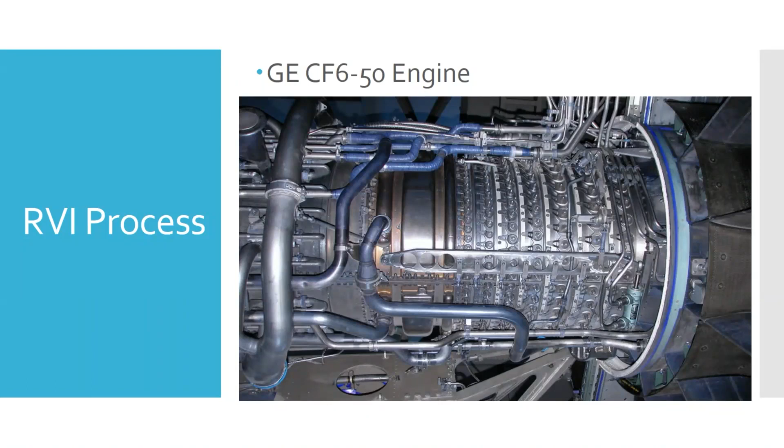So remote visual inspection allows us to look inside. So what you'll do is you'll go into an NDT manual. You'll see something that looks like this. And this is basically a roadmap for how to look at different areas. So what it's saying there in that table on the bottom, if you want to look at the 9th stage compressor blades, for instance, just going off the list, 9th stage, it says there are 66 blades.

And if you want to look at the leading edge, you go into port, what they have labeled B1-8. So B1-8 is right here. You would disconnect the bleed duct and you would stick your scope into that bleed duct to go look at the blades. And then it says if you want to look at the trailing edge, B1-9, well, that's the same location there. Okay, so that's a pretty easy one.

What if we want to look at one that's further forward? If we look at stage 4 here, for instance, it says to look at the leading edge, we go to B1-3, and that's pointing to this little thing here. Any idea what that is? So that's a little threaded boss, a little threaded hole with a plug in it. And it exists specifically for borescope. Okay, that's a borescope port.

And if we want to look at the back of that stage 4, we would go B1-4, the one right behind it, which would also allow us to do the front of stage 5. So they build these different ports in. If there's access, the manufacturer tends to have you use the access that's there, like the bleed duct. If there isn't already an access there, then they're going to put in some kind of a port, typically, to be able to see different areas.

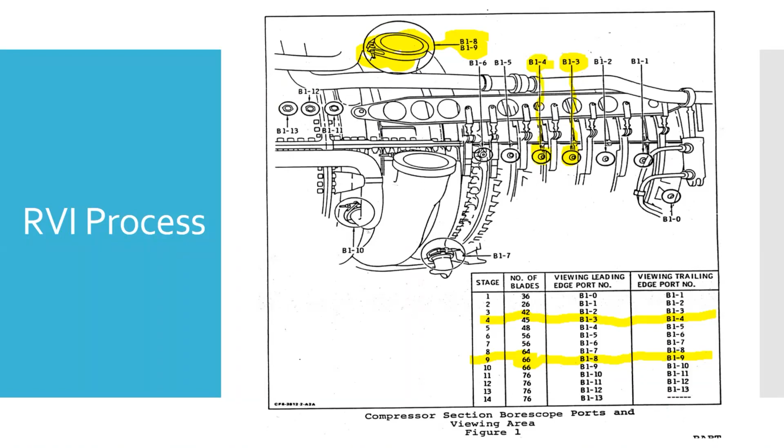So if we put them side by side, you can see this right here. There's that support structure there we can use to help navigate. You can see the same support structure right here. So all those borescope port plugs are right below it down in this area. We can't really see them as the picture's too far out, but you would basically remove one of those plugs and you can stick your borescope in. Or the bleed duct.

It's barely shown on here. I'm trying to remember where it is exactly. This is rotated a little bit, so I know there's this duct here, which I believe is this one right here coming off. Not sure exactly. I think we're on kind of the opposite side, but you get that. So there's that roadmap that would be in your NDT manual.

And often these can either be contained in a section of your engine manual or your aircraft maintenance manual, or on some of your bigger aircraft, there's actually a whole separate non-destructive testing manual that gives you the procedures for these different things. So these procedures are written by engineers, and in NDT, there's 3 levels.

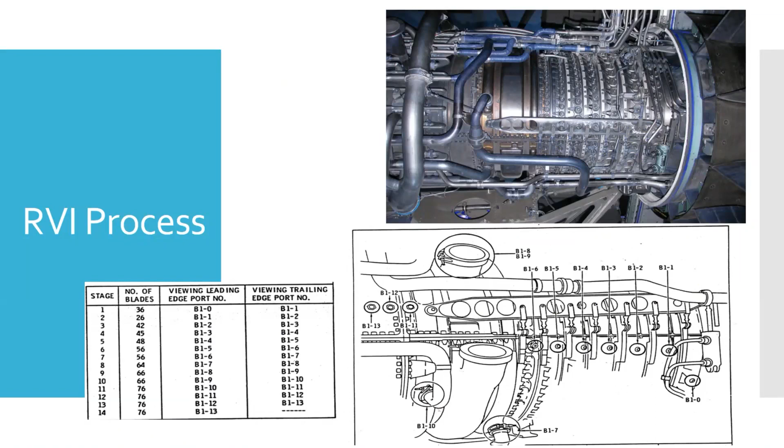But if you're working at like an airline or an MRO, the highest they typically have on staff is a level 2, unless they have a technical engineering department. Otherwise, the engine manufacturer would have a level 3, or a third-party independent company that they bring in to help design these procedures would be the level 3 writing.

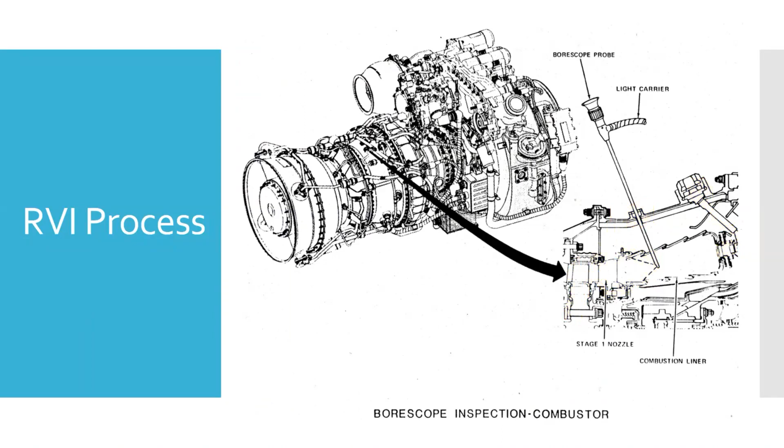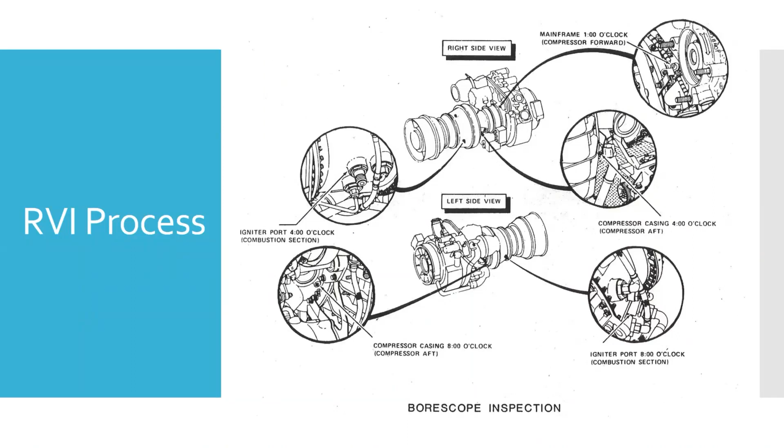Here's some other ports that they show, just kind of an option of what different areas you can look at. So igniter ports, compressor cases, they've got different ports that can come out, items like that, again, just to get to different areas of the engine. Here's what the engine looks like.

So, stop. There we go. So here's the engine, and in this case, you've got your igniter ports down here. They're in with the fuel nozzles, right in this area right here. Okay. So it's, again, that roadmap to kind of help you.

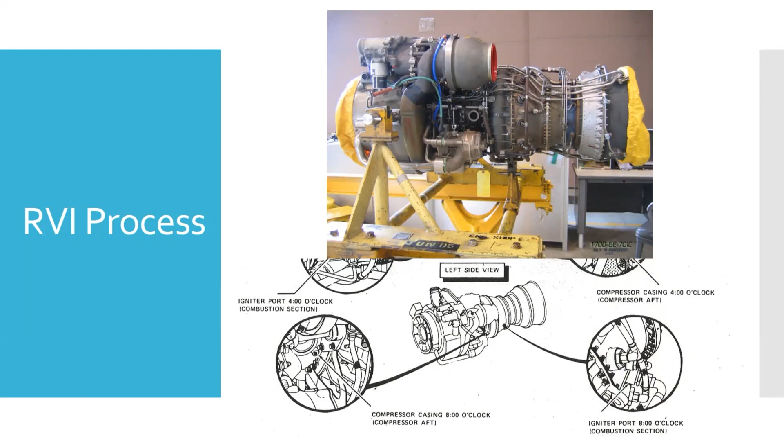So we start looking inside of stuff. Once we start looking inside, then we need to be aware that things aren't always how they appear. Objects aren't always how they appear. So perception is one. Perception is the neurological process. We're going to take an image, we're going to interpret it, and put it in effect.

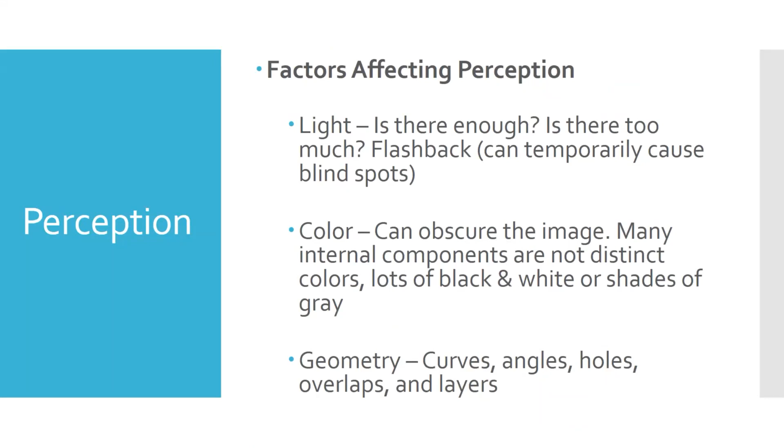So other stuff, orientation. We looked at the two people looking at the number 6 or the number 9. Orientation can make things look a little bit different. Which way is up? Is the scope pointed up? Is the top of the screen up, or is the top of the screen down, or maybe the top of the screen sideways, depending on how the camera gets rotated on the end. A big one is expectations. And that's where I was talking about going in and looking at parts that aren't maybe installed. Have some expectation of what it's supposed to be. Don't let those expectations get in the way of finding something, though.

Okay? When we're doing this in class, you are going to find indications on just about every part that I give you, right? Basically every part. The reason we have these parts set aside for NDT is because they have damage that we want you to find and be able to see how things look. If you're out in industry, if you're doing this, what do you think you're going to find 9 out of 10 times or 99 out of 100 times? Nothing. Most of the time you don't find anything, and most of the time you don't want to find anything. But don't get complacent. Don't get so set on, I never find anything, I don't know why I do this, that you miss it when something is actually there to see.

Okay. Equipment issues, another thing to look at. So, what's the quality of your equipment? How well is it maintained? Is the light getting dim? Are the electronics working right? Last year, the video scope got dipped into an oil pan and it blurred our video for a period of time until I could get the oil out.

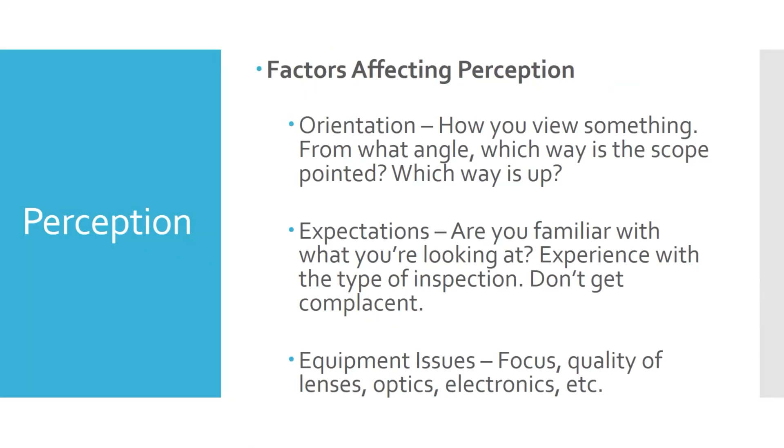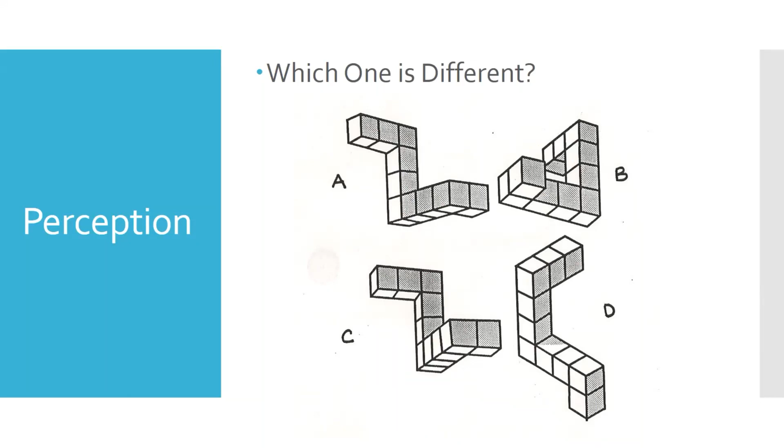Okay, so they're similar, very similar, but one looks a little different than the rest. So just be aware of that kind of thing. Things will look very similar inside of there. Okay, here's our next one.

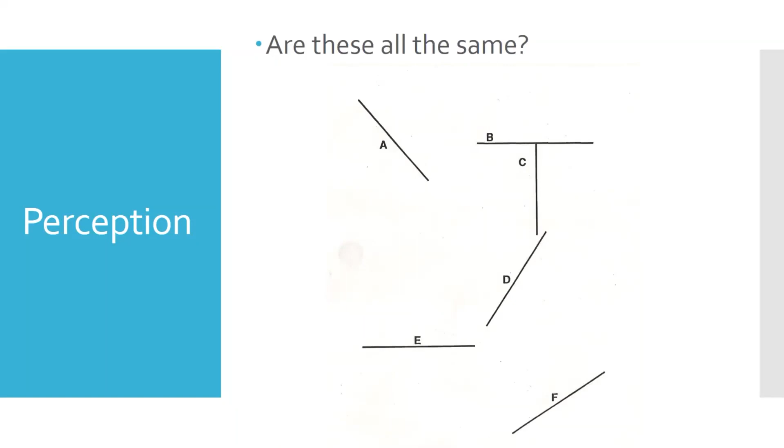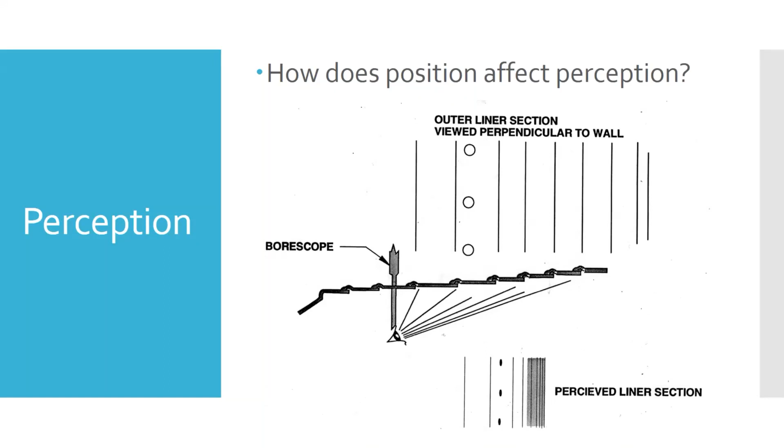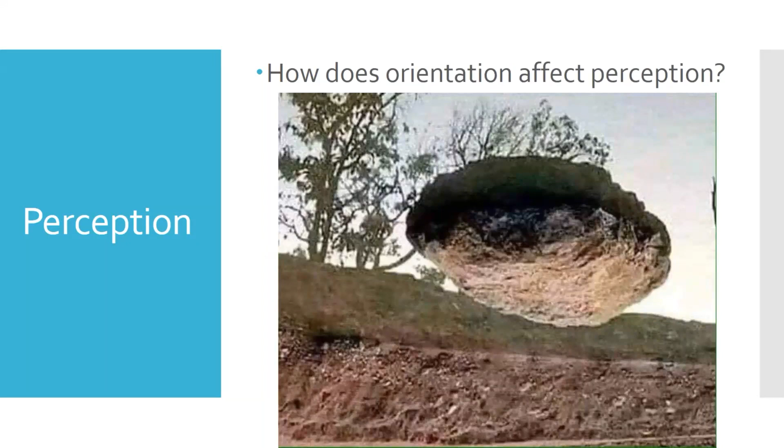How about our next one? What's going on here? My floating rock. Is the rock floating? Think it's a reflection on water? What if I flip it over? Okay. So you've got the floating rock because our camera got turned upside down, or we've got a rock sitting in some muddy water.

So these are all things we need to keep in mind as we start to look inside of areas. We're looking through tools that can potentially cause some distortion. We're looking at angles and orientations that can cause some disorientation. You've got to keep that in mind. And so it's going to take some practice. When you pick up these scopes and start using them, you'll notice there's a learning curve to figuring out where things are at.

And one of the things you're going to have to do: I have a box called the mystery box. It's got a borescope port, and you have to map out where everything is in it and basically sketch a map of what it looks like, the shapes and orientations of certain items inside of it. What's up and down, what's in front of and behind stuff, and what shape it is. You'll do that as an activity to help you learn to navigate using these scopes.

So that wraps up borescopes. Let's go ahead and take a 10-minute break.